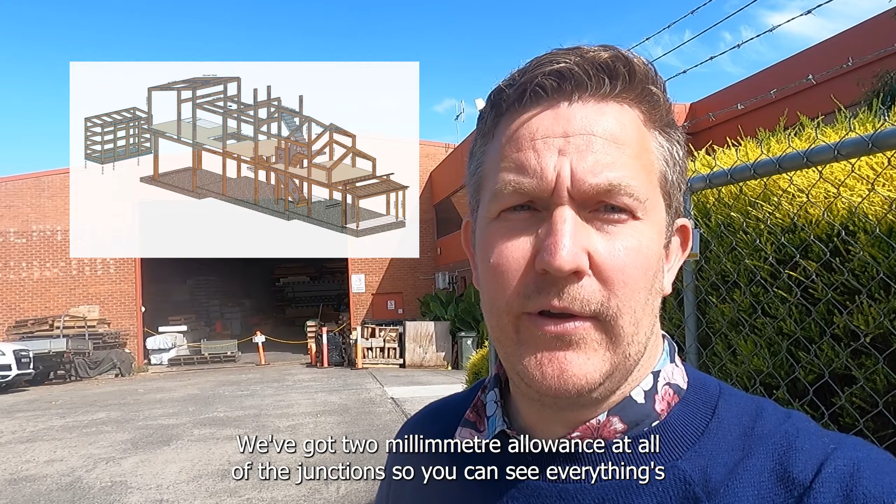Very exciting morning. We're out in Bayswater at the TGA factory to see the glue-lam posts and beams that have arrived from Ash. They're all inside at the moment, being CNC machined on 5-axis machines to the design I've worked on with the engineers. Very precise tolerances are at play here. We've got a 2 mil allowance at all of the junctions, so everything's got to be measured, checked, and remeasured. It's all got to fit together perfectly. So we'll go in now and take a look at how everything is shaping up for the project.

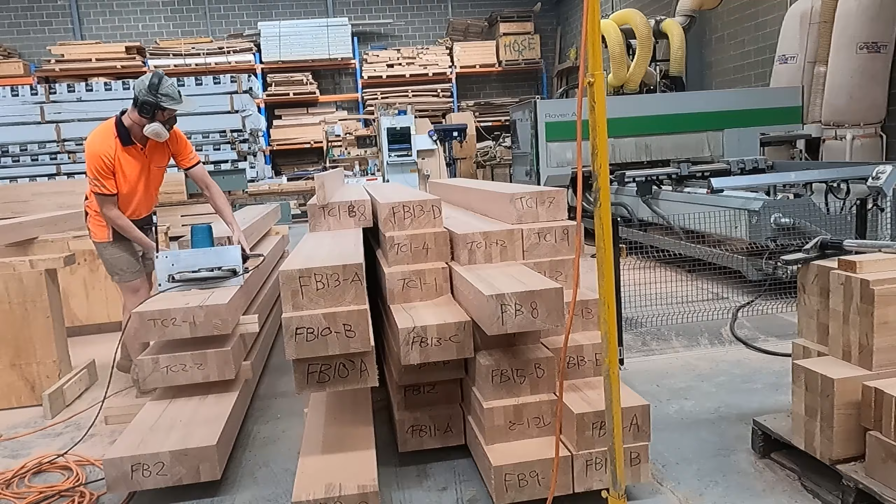So that's the lower batch, ground floor, and then the upper floor is.

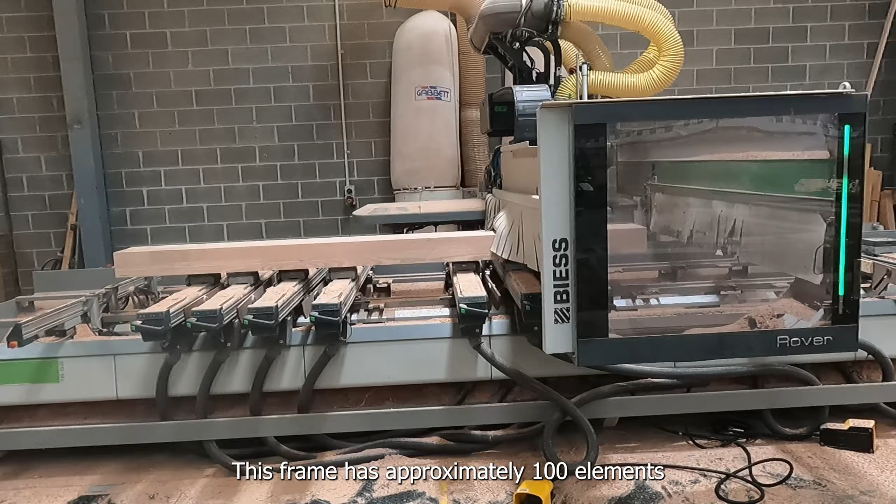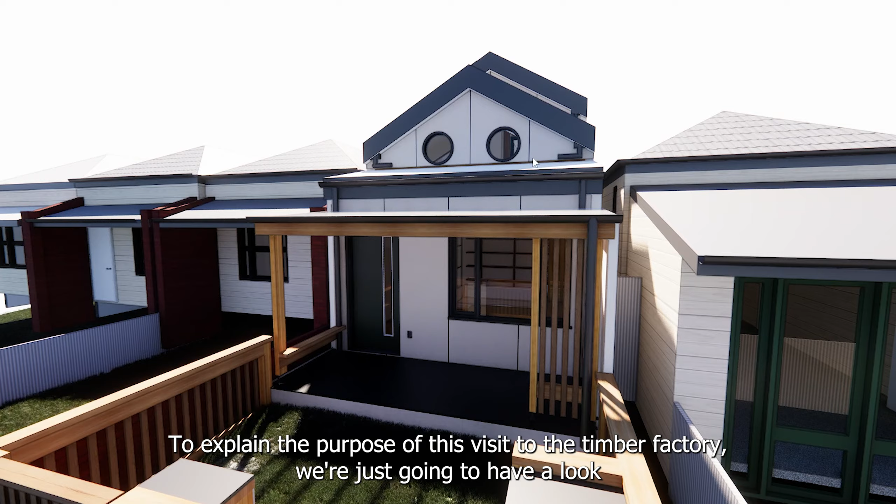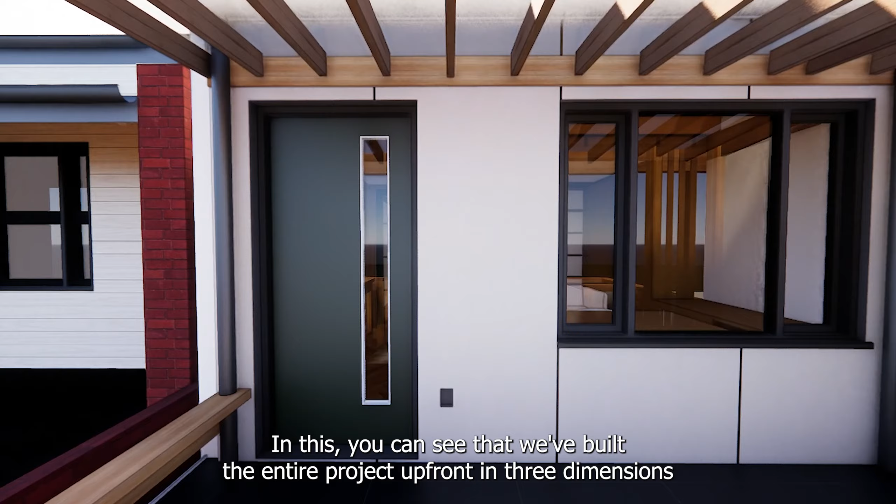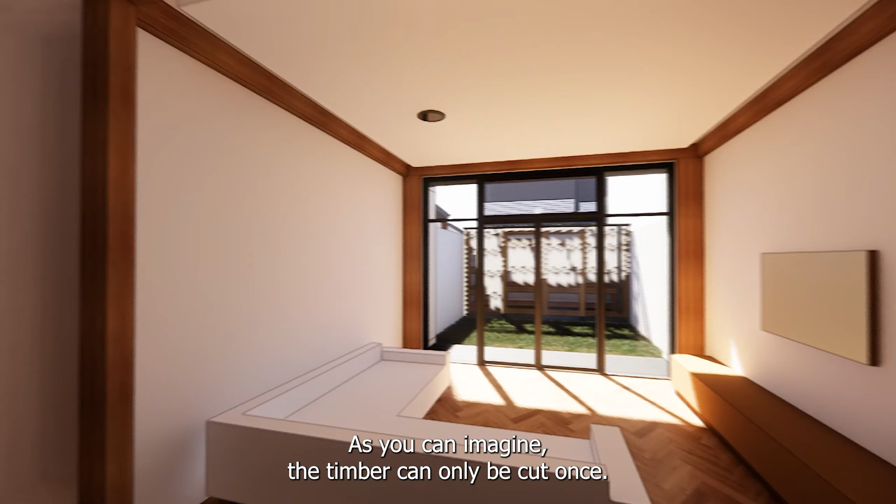To explain the purpose of this visit to the timber factory, we're going to have a look at the 3-dimensional model that we produce for most of our projects. You can see we've built the entire project up front in 3 dimensions, and we've coordinated the structure with the rest of the house. It's quite a tight site, so we're trying to maximize what we can get onto the house. We had to make sure our heat recovery ventilation, structure, plumbing, and everything else works in advance. As you can imagine, the timber can only be cut once, so we have to check and recheck the dimensions, and that's what we're doing on site.

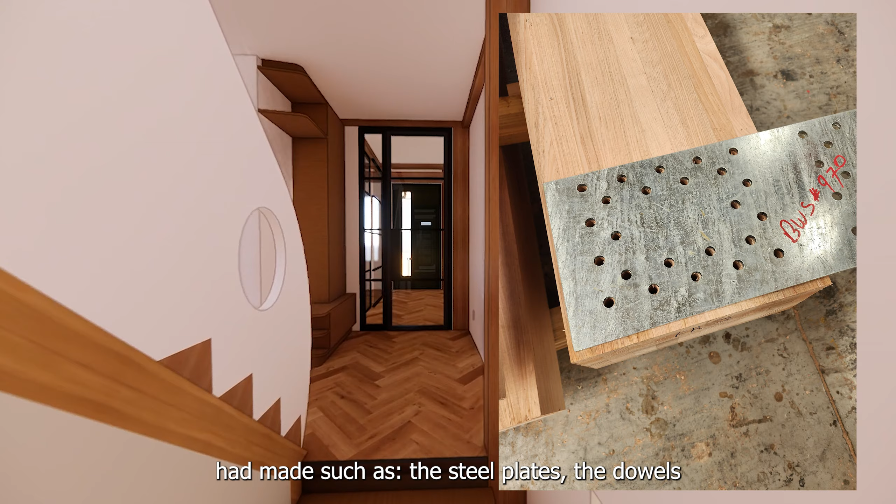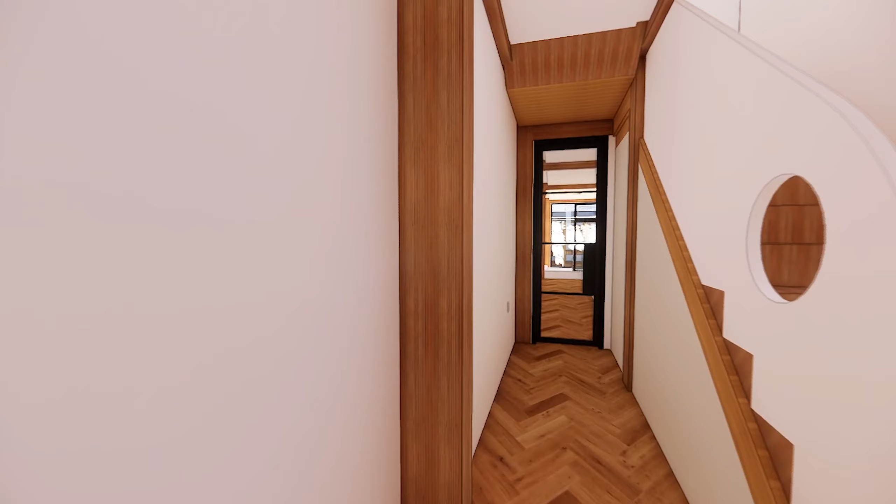We're going back to the engineers and checking that what the builder has had made, the steel plates and the dowels, all work with the timber being milled on the CNC machine. We're also making final decisions about how to treat the timber. We're going to use a natural sourced oil that has no VOCs, and we'll also gently round the edge of all of the glue laminated elements.

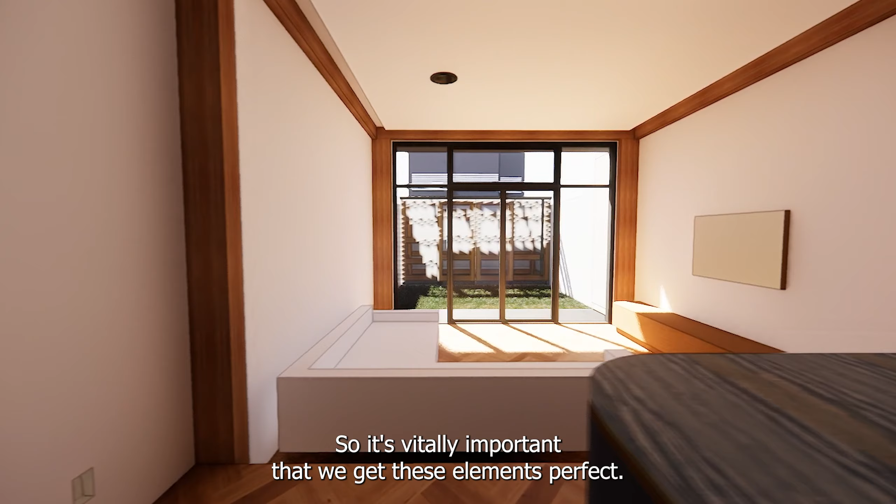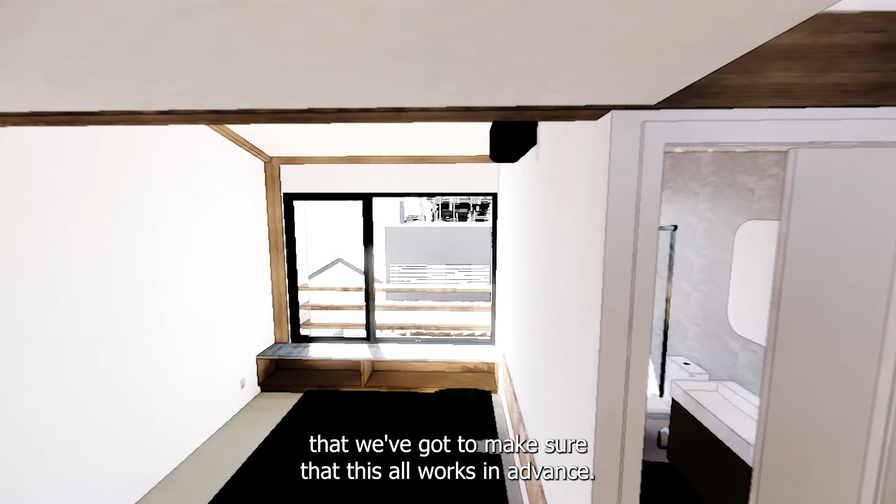You can see in our 3-dimensional model that the glue lamination will be visible as a post and beam in the corners of every room, so it's vitally important that we get these elements perfect. There is no room for error here - we have a 2 mil tolerance all around. As we fly through the 3D model, you can see we've had to make sure this all works in advance, so when it delivers to site it should all assemble together perfectly. So that's the purpose of the visit today.

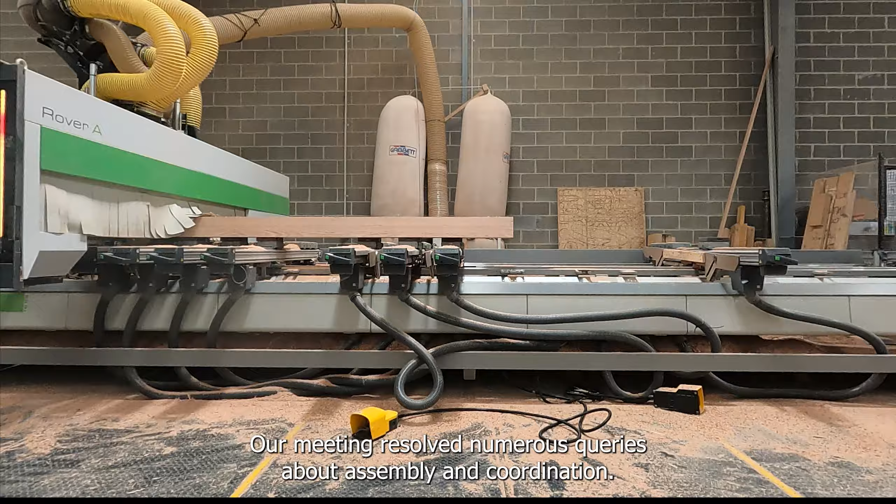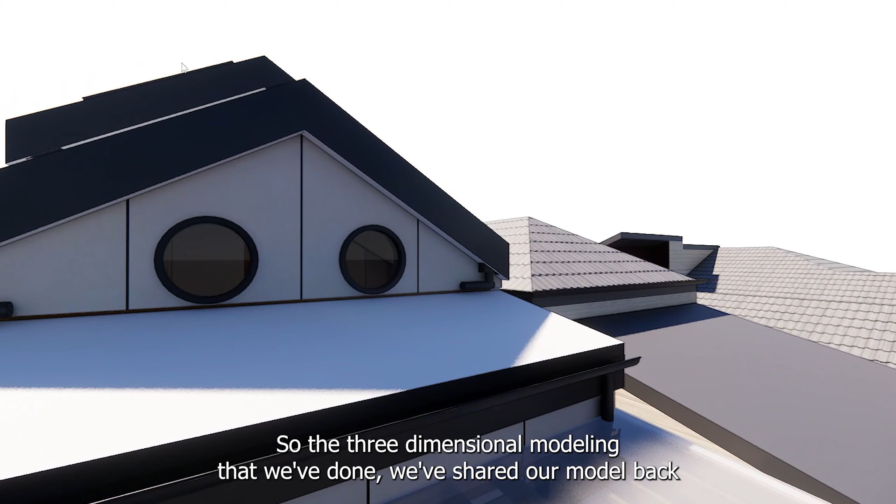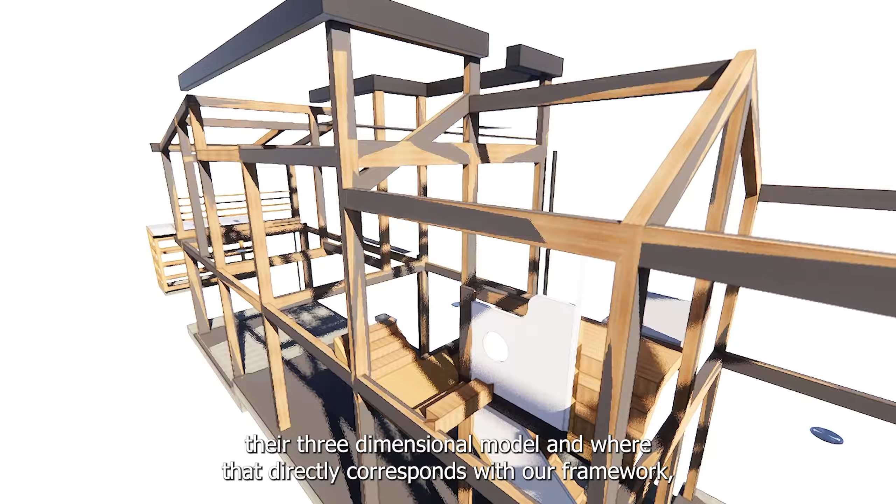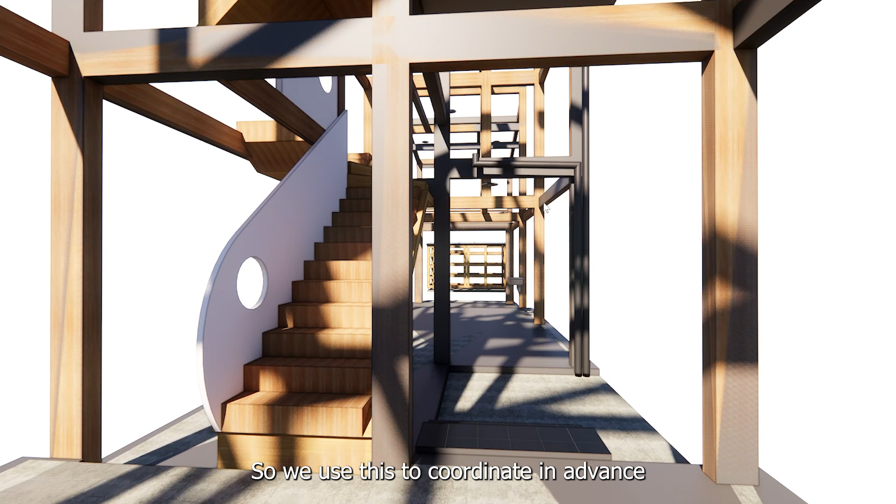Just before I finish this section, I'll show you how powerful this tool is. With the 3-dimensional modeling we've done, we've shared our model back and forth with the engineers, and through each iteration we've checked theirs. In this example, you can see the engineers have given us their 3-dimensional model, and where that directly corresponds with our framework, it flashes as a gray element, meaning it's perfectly aligned in 3 dimensions with our model. We use this to coordinate in advance and make sure there are no clashes between the two proposed models.

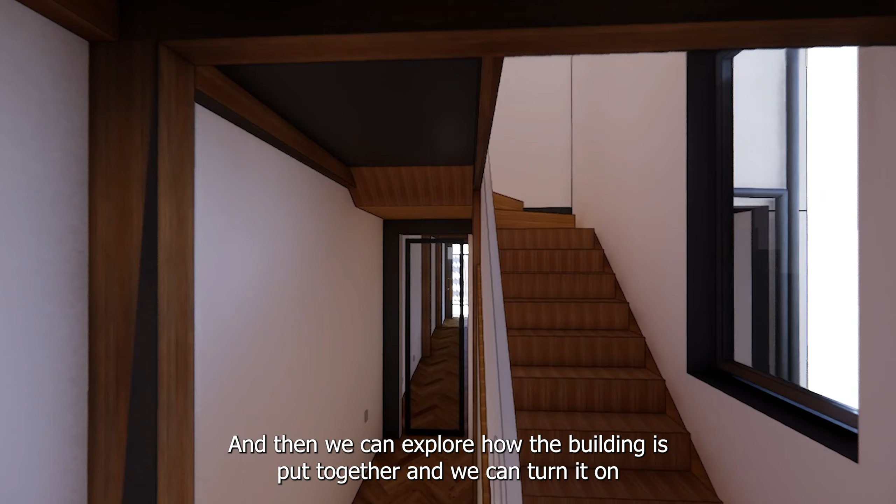We'll just return it to a more normal view now. You can see we can decide to share with the builders or anyone else which part of the 3-dimensional model they might need. Then we can explore how the building is put together, and turn it on with the overall context of the building, including the neighboring structures as well. So that gives you a brief glimpse into the power of the 3-dimensional modeling that we do.

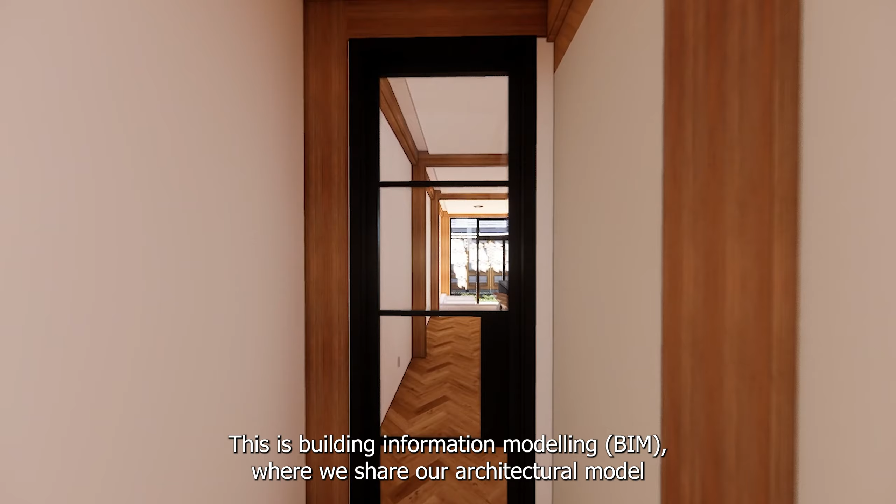This is building information modelling, where we share our architectural model with the engineers and other consultants involved in a project.